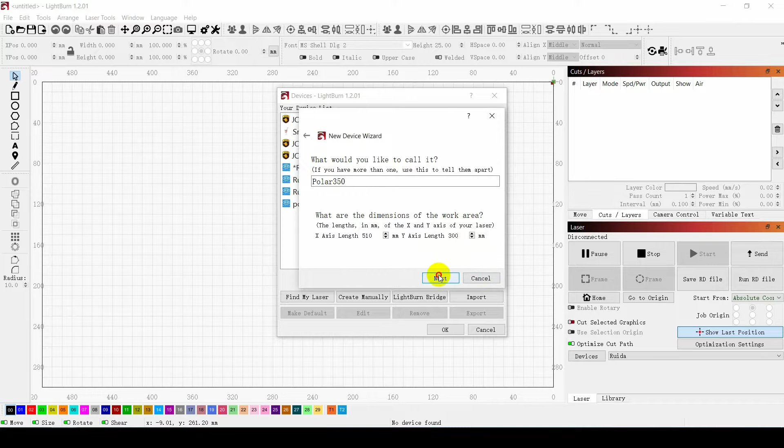Select the mechanical origin as rear right, click on Finish. Finally, select the machine name, Polar 350, just entered in the software to connect to the machine.

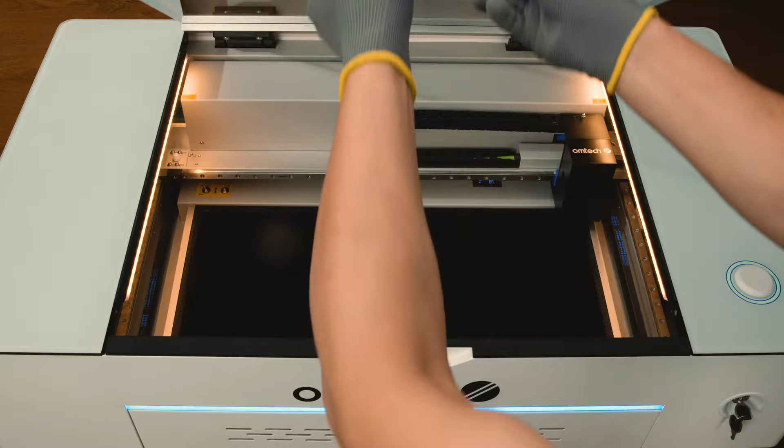Part 2, Flat Engraving and Cutting. Firstly, you need to measure the thickness of the material and place it into the engraver's main bay. Then open the Lightburn software.

After that, import the picture you want to engrave and click on Open. Then adjust the size of the engraved picture. If you need to cut the carved pattern on the wooden board, please draw a range.

Click on Edit Machine Settings Focus Distance, then enter the corresponding distance, and click on OK. Here is the formula for focal length measurement: the input distance equals 17 millimeters minus the thickness of the plate to be engraved.

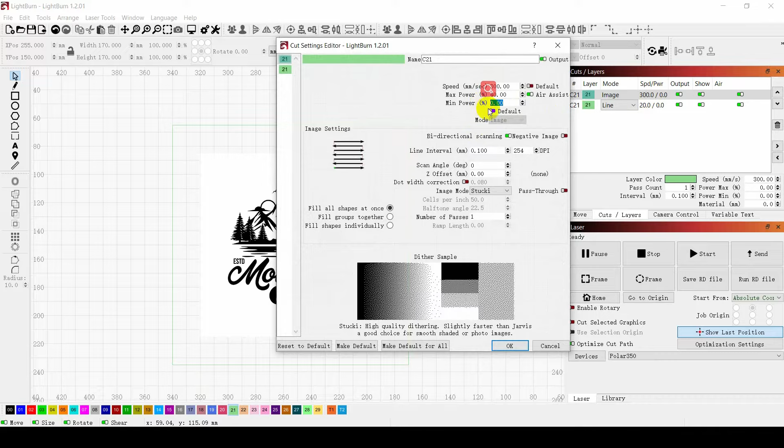Modify the engraving and cutting parameters, speed and power. After modification, click on OK.

Click on Move Focus C to focus on the engraving head. Click on Frame to see if the engraving and cutting area is within the set area. Click on Start to start engraving and cutting.

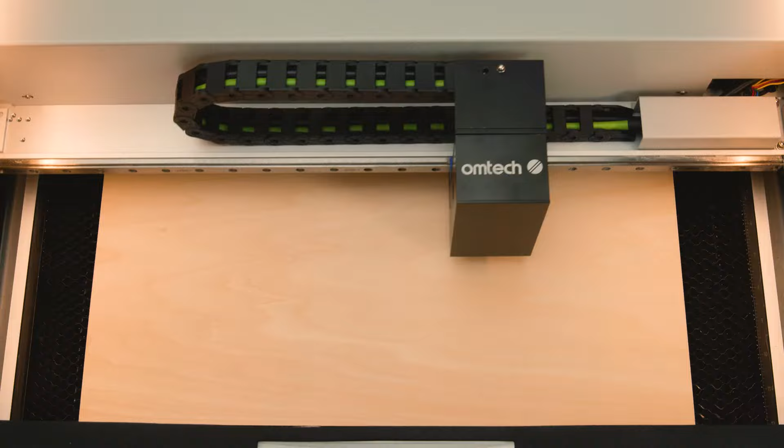When Polar starts engraving, the duct fan can be turned on as needed, and the airflow and working time can be adjusted using the wirelessly connected remote control panel. Finally, a perfect carved wood panel painting is completed.

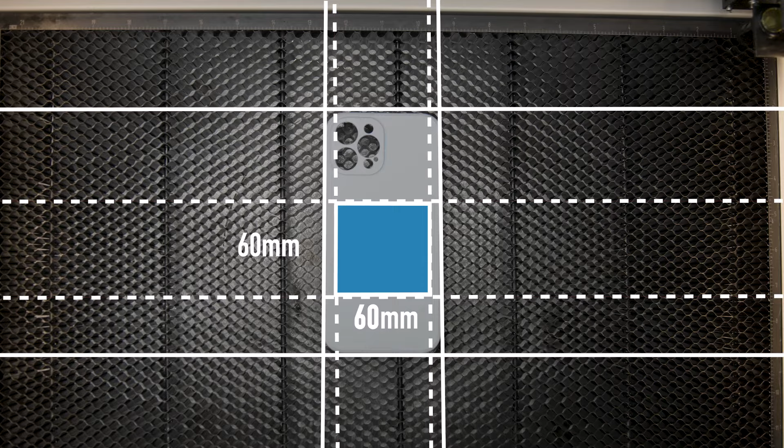Likewise, if you want to engrave on a relatively small object, you need to determine where the pattern is located, and change the parameters in the software to achieve the desired engraving effect. When the engraver is finished, remove your work and examine the effect.

Part 3, Camera Calibration. Please download the basic board file in advance and print it. The first step of camera setup is to connect the USB cable from the machine to the computer. If the indicator light of the camera is on, it means the connection is going through.

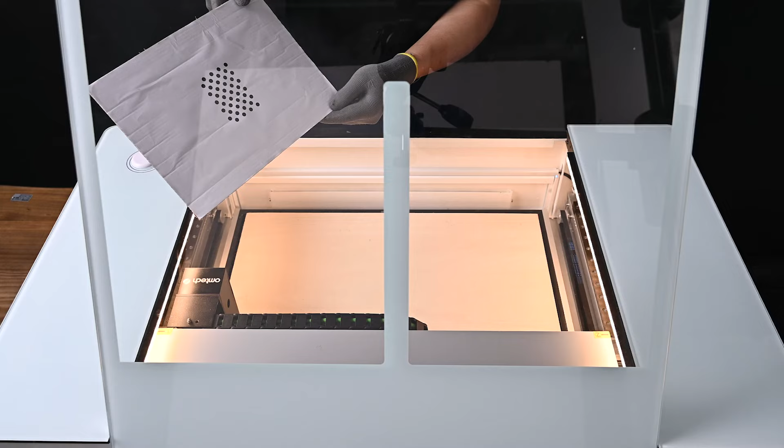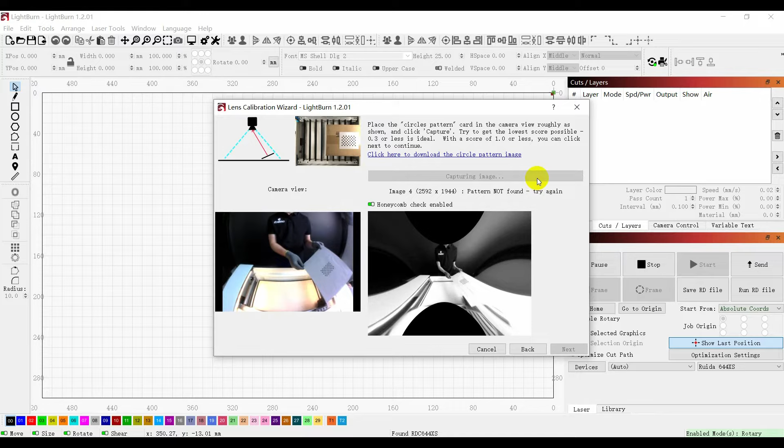Click on Capture. Make sure the score is less than 1, preferably less than 0.3. If not recognized, fine-tune the angle and position of the reference plate, then click Capture again. When the score is less than 1, you can click on Next.

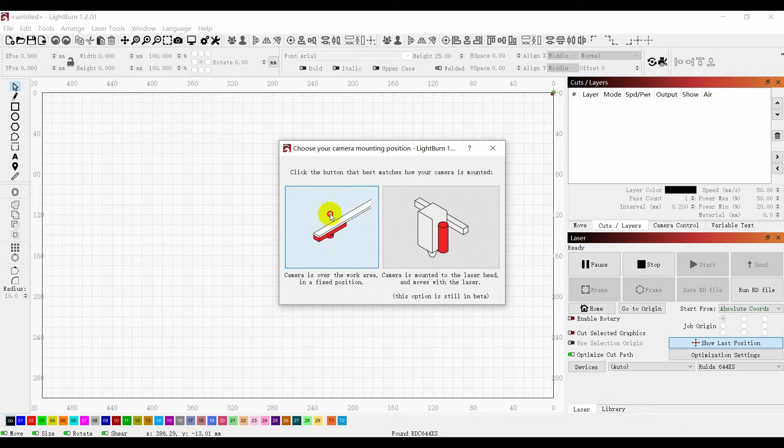Change fill power to 40, line power to 50, fill speed to 300, and click on Frame. If the focal length has not been confirmed, the material thickness needs to be measured and input to material thickness.

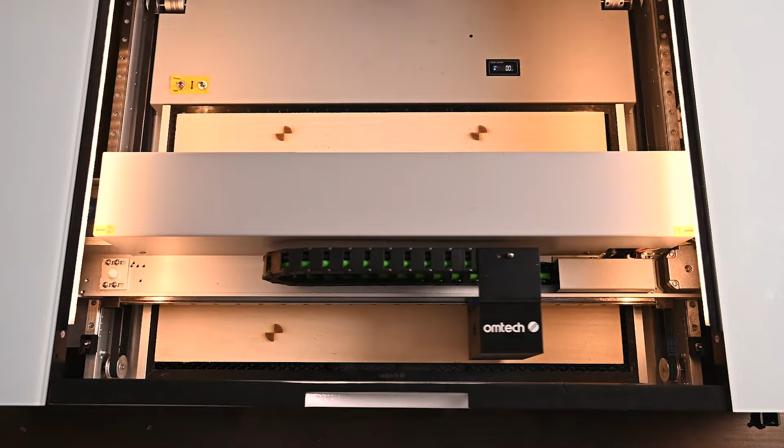Click Start to start carving. Carving is actually carried out on the wooden board, as shown in the figure after the end. After processing, click on Stop.

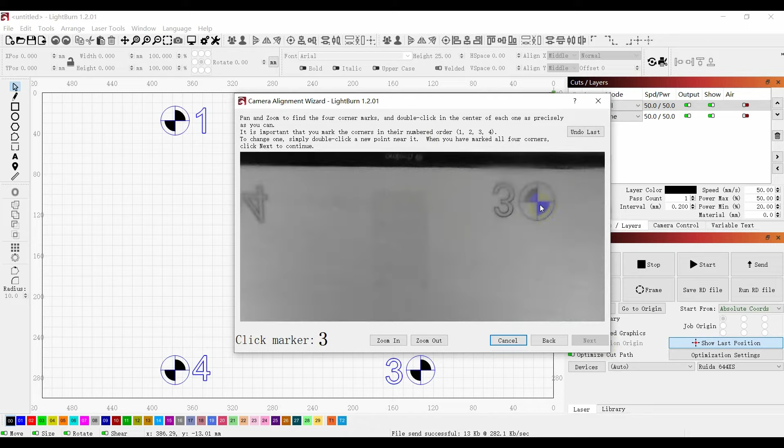Click on Capture Image. Enlarge the picture, then move the mouse to the center of the 4 patterns one by one to form a box of red box lines. Finally, when this interface appears, click on Finish.

Congratulations! You have completed the steps of camera setup.

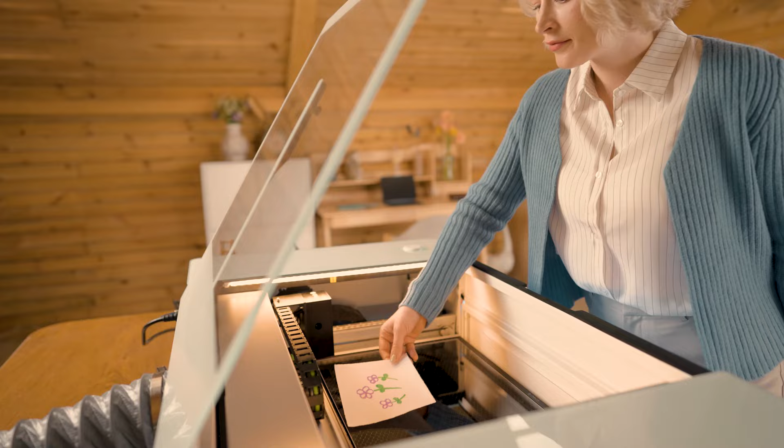Part 4. Recognize the image for engraving. Next, we will show you how to actually use this feature. Put the pattern to be engraved on the honeycomb bed, and click on Trace.

Select the area to be engraved, modify the cutoff and threshold, and click on OK. After clicking OK, the image will show. If you need to cut an engraved pattern, draw or import the image shapefile.

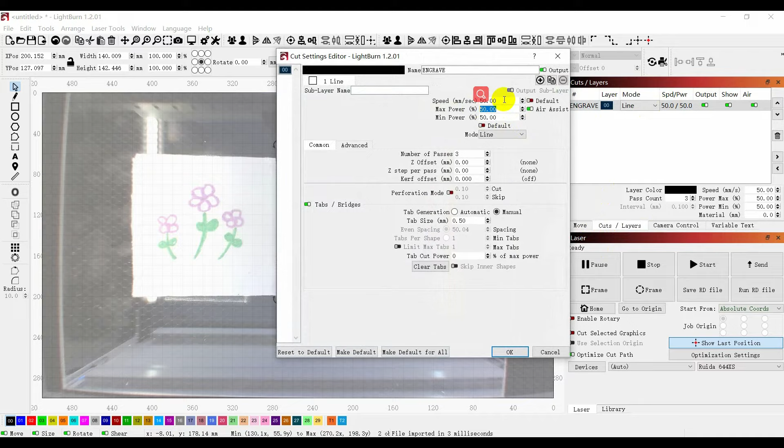Align the 2 layers that need to be cut. Finally, set your cutting power and speed, and click on Start.

Now you have a good-looking decorative light.

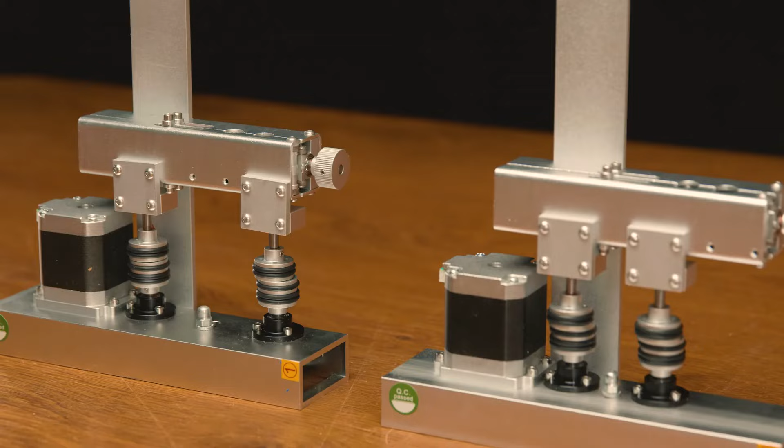Part 5. Rotary Axis Use. The OMTech Polar also comes with 2 custom-purpose rotary axes. Turn the engraver off. Like with thick materials, remove the debris tray and the workbed.

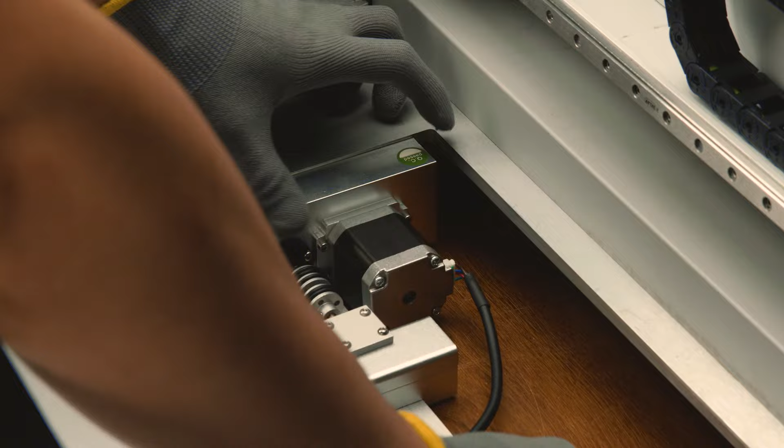Insert the connection cable and place the rotary in the front left corner of the open bay. Plug the 4-pin connection into the socket at the rear left. Flip both rotary switches back towards the rear of the machine. Lock the protective switch into place.

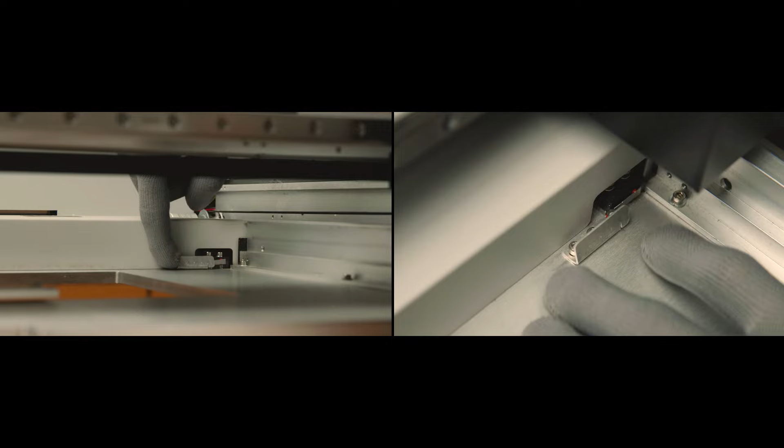Gently move the laser tube and X-axis rail to the correct set of arrows. Rotary axis 1 uses the right set, rotary axis 2 uses the left set. You can choose the right rotary axis according to the thickness of the item.

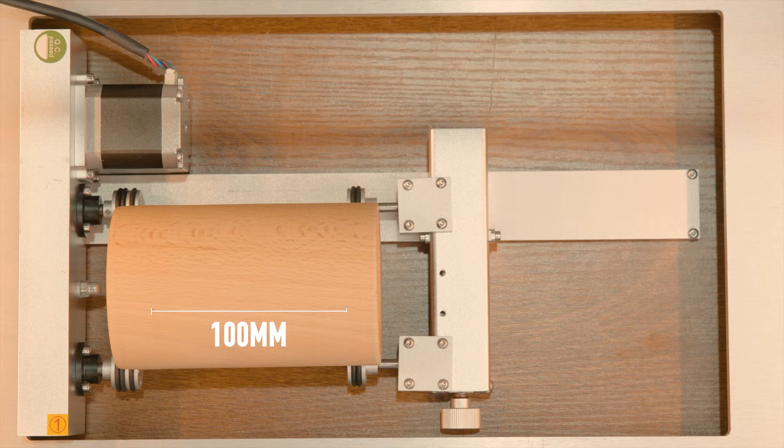Measure the size of the desired engraving on the item and mark it, after determining the position and size of the engraved pattern. First, import the pattern that needs to be engraved, and set the size of the engraved picture. Click on Edit and select Machine Setting.

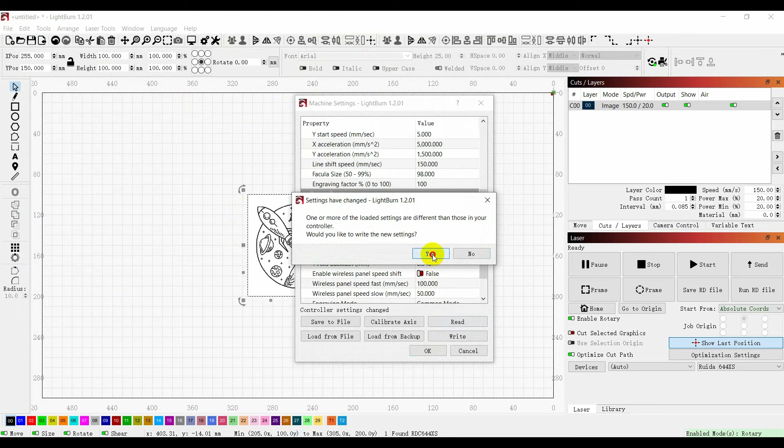Set the focus distance according to the height of the engraved item. Click on Laser Tools and Rotary Setup, change Enable Rotary to green, and set the desired parameters. Modify to your desired power and speed, and click on OK.

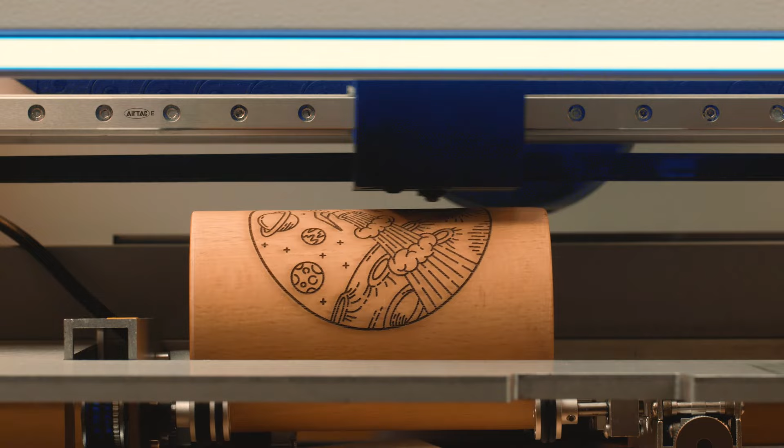For conical objects, use the adjustment knob to create a level surface and adjust the item to a horizontal position. After setting the parameters, you can start engraving.